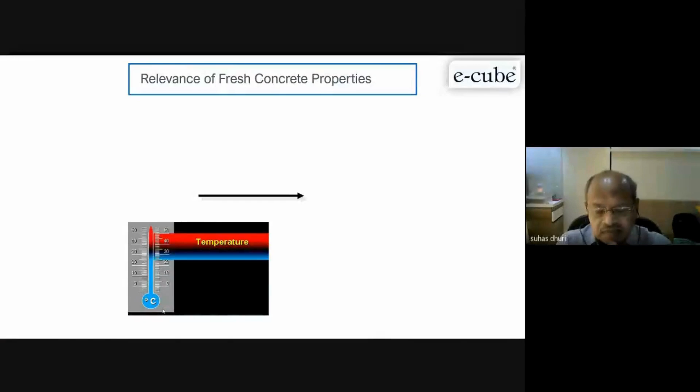Relevance of fresh concrete properties.

Now the properties of concrete, especially what we are interested in, is the flow or workable concrete. Now when you are producing concrete from your transit mixers...

Distance is not much different. Time is more important because sometimes with heavy traffic, even 2-3 kilometers can take half an hour. If you travel by highways, in half an hour you can cover about 20-30 kilometers. That depends upon the traffic. So your workability is basically about time - how much time is required to travel from the batching plant to your site.

From site, it has to be placed by various means. Here we are placing with pump. Pump has got various capacities, and what height it is pumping depends upon your placing capacity. Maybe pumps are designed for 40, 50 or 60 cubic meters per hour - they can place that much concrete. But how much concrete we are actually able to place at site depends on the available equipment and manpower. That one has to understand.

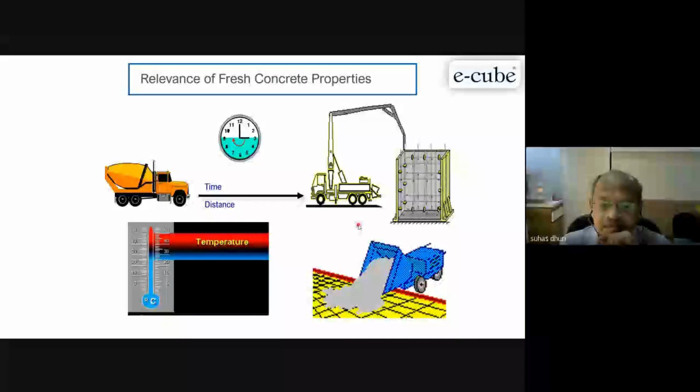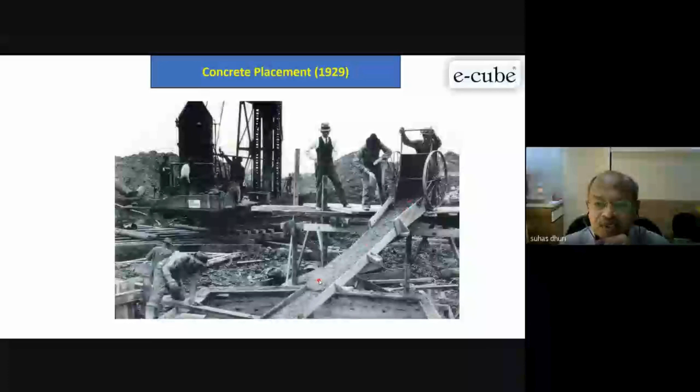Now here's how, earlier - you can see back in 1929 - they were placing concrete directly from the chute, because mechanical means were not there at that time.

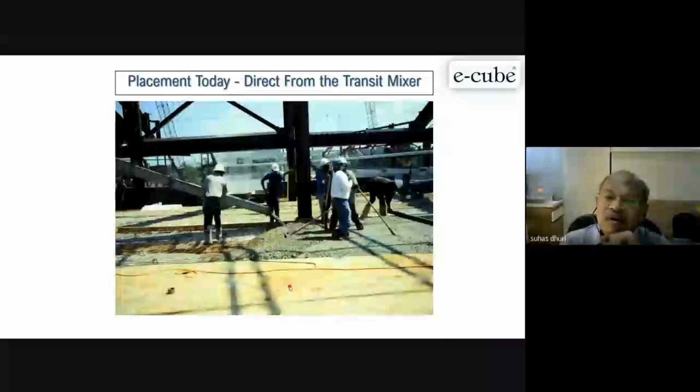This is for roads - directly from the transit mixer we can add, because slump is limited here. But the same concrete is not possible for pavers. When you do the PQC, it's not possible to have such a high flow because the paver is moving continuously with time. So with a fixed form, this is okay - all fixed forms are there. We'll have about 80 to 100 slump, not more than that.

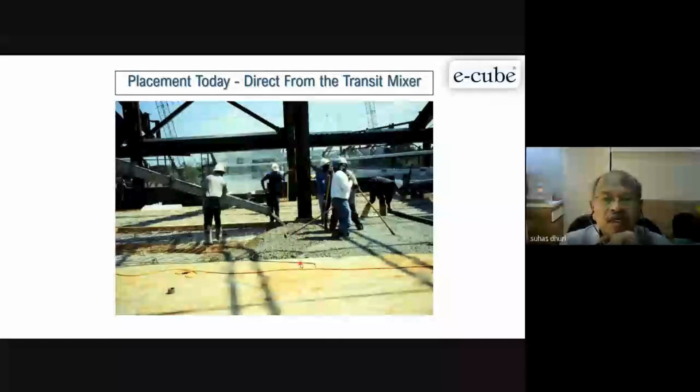So how to handle it, how many people are there, vibrators are there - accordingly you can have a placing time for the concrete.

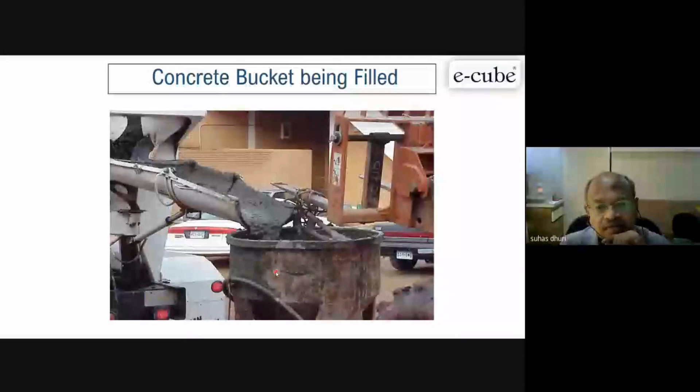Somewhere we can use buckets, because only small columns or capitals of columns are there where it's very difficult to pump, because pump requires a certain minimum quantity. So there we can use buckets. The bucket also requires different workability requirements - without segregation, you can place this concrete.

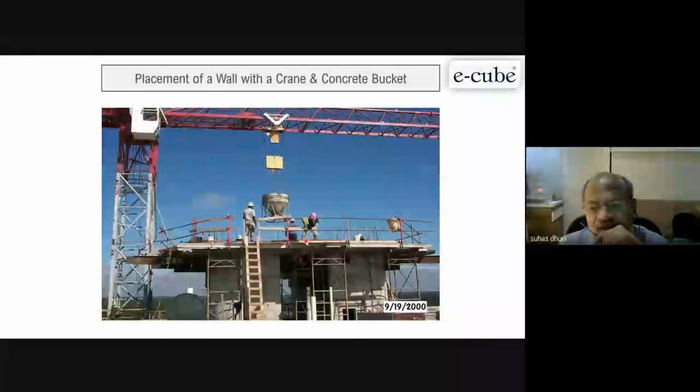See here, crane and bucket are there, and they are placing - because for a small house, instead of pump, they can use only bucket. This is a 1 cubic meter bucket, or 0.75 cubic meter. Today we are getting very big buckets also, 1.5 cubic meter at a time - we can place the concrete, especially for vertical elements.

One has to remember pumping may not require very high flow. Even about 60 to 80 slump also we can pump the concrete if it is designed properly. Pumping also requires designed concrete for pumpable concrete. Normal concrete and pumpable concrete are totally different.

Mix is there we have to design. We cannot normally place concrete which was shown for buckets. We may not be able to pump it, because pumping requires different mix proportioning. Rather the fines content has to be adjusted.

So if you have very high flow, it also sometimes may not pump properly. So pumping concrete is different than normal manual placing of concrete. One has to remember this.

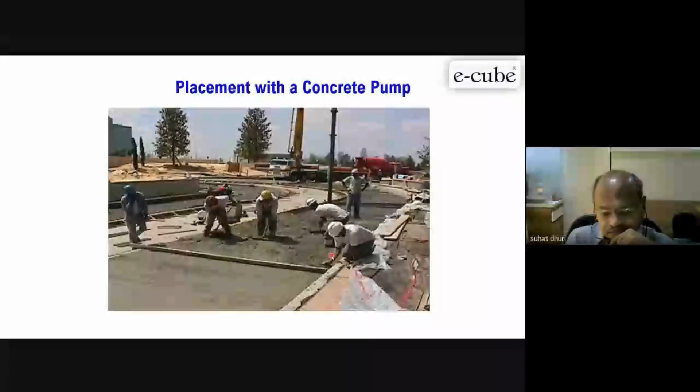This also, see here, they are doing very large industrial flooring using pumps. Here, this is a TM. You can put it into the pump hopper, and with this pipeline it is going to put the concrete here.

One advantage with this is that very minimum manpower is required. You see, this is a vibrator chap. This one is only holding the chute here, pipe, and this is your paver, the leveling equipment.

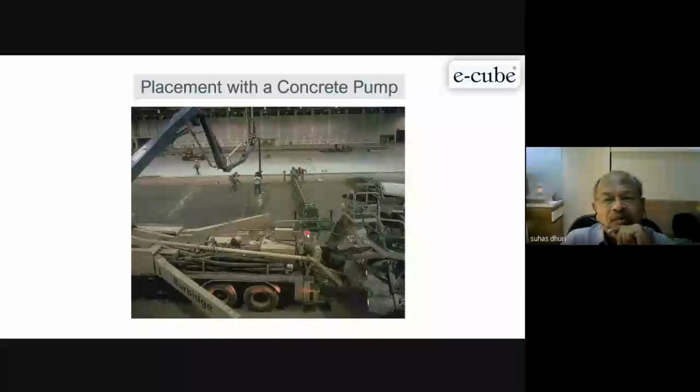This is also laser based leveling equipment where you need very precise leveling of your floors. Generally, wherever you have very big warehouses, their height is more than say 10 meters, 20 meters, there they require a very high level to the floors. So there they use mechanical means, laser based paver or leveling equipment to have a proper precise flooring.

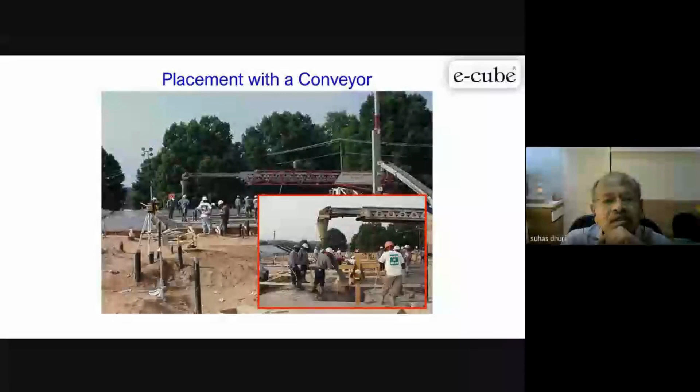Now conveyor belt mix is also totally different than normal pumping, because here pushing is not there, it is conveying the concrete. So you should not have a very high workable mix for this.

So all your workability of your concrete depends upon the paste properties of your binder. That one has to remember.

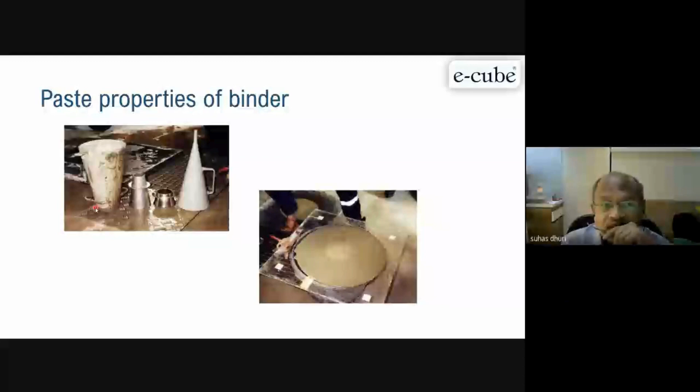This slide I show because we have to understand the paste properties first, and from paste properties itself we can predict what will be the slump of that concrete. So one has to remember this, because everything depends upon the viscosity of your mix.

Now a viscometer is also available, but that is very high cost. But those are also possible to predict the final flow of your mix.

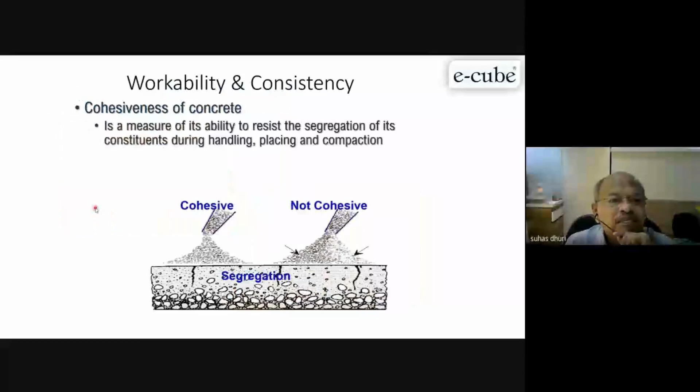So one of the properties what we are looking at in all concrete is cohesiveness. This word one has to remember as a QC engineer or placing engineer. It's the measure of ability to resist segregation of its constituents during handling, placing, and compaction.

So this is the process we are following for any concrete. Any concrete has to be transported, then handled, placed, compacted, and then finished. So this is the process we follow for all concrete.

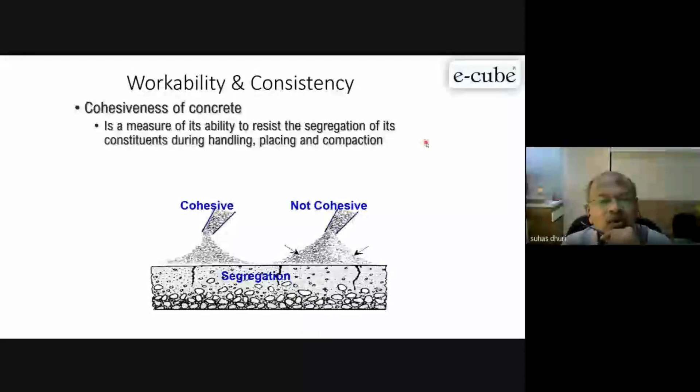So your concrete should be cohesive only, not non-cohesive. You see here, coarse aggregates are here and fine paste is here, which is not acceptable.

Even here also, after compaction, what happens you can see here. It's only paste and coarse aggregate at the bottom. Now this will shrink and then start cracking.

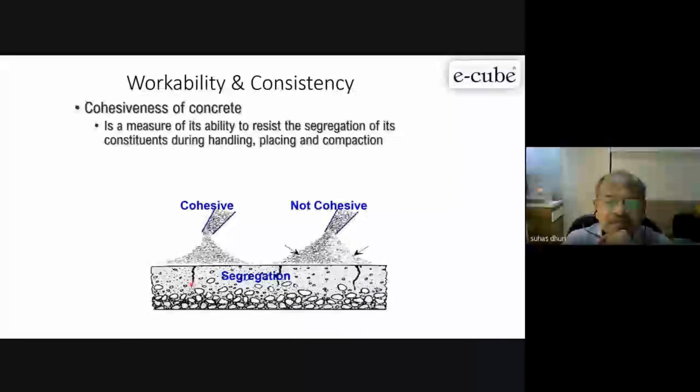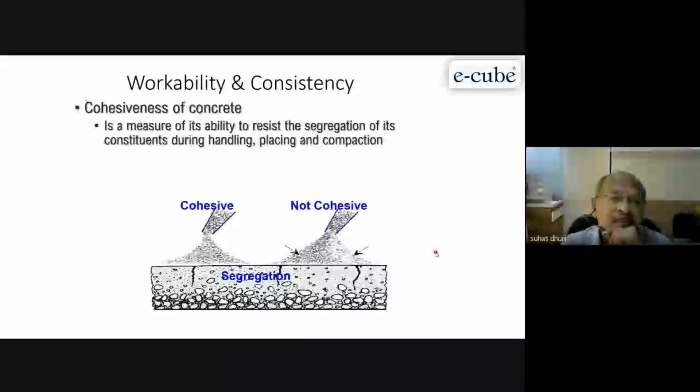Though it is cohesive, once after vibration everything has settled down and segregation has taken place. So one has to design a concrete in such a way that my concrete throughout its placing time should remain in a cohesive state. That is very important.

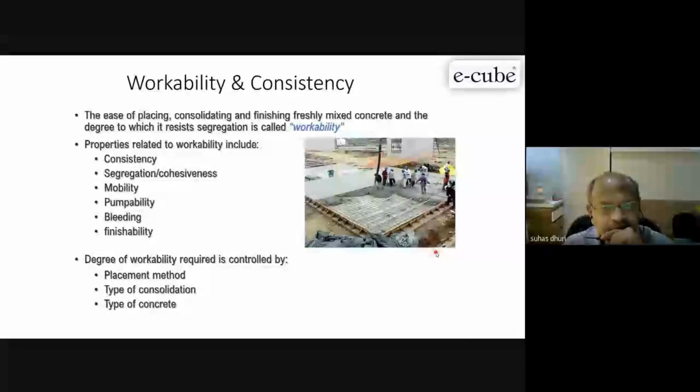Now let's discuss workability. Basically, ease of placing, compaction, finishing of freshly mixed concrete, and the degree to which it resists segregation is called workability.

Workability includes consistency, because it should be a consistent product. Number of transit mixers you are supplying, maybe 100 cubic meters supplied via 15-20 TMs, all that concrete should have consistent workability.

Consistent in the sense of an acceptable range. Suppose the slump is 120 plus or minus 20 mm. It should not be 80, 60 mm, and also should not be 200 mm. That is not acceptable. So one has to remember this accordingly.

Segregation resistance and cohesiveness should be there. Mobility is important too, because some concrete is workable but very difficult to place with vibrators - it doesn't respond, it's a very sticky mix, which is not acceptable. This may be due to various reasons we'll discuss under mix design. So mobility is important because concrete has to move easily with minimum external effort, that is vibration or consolidation.

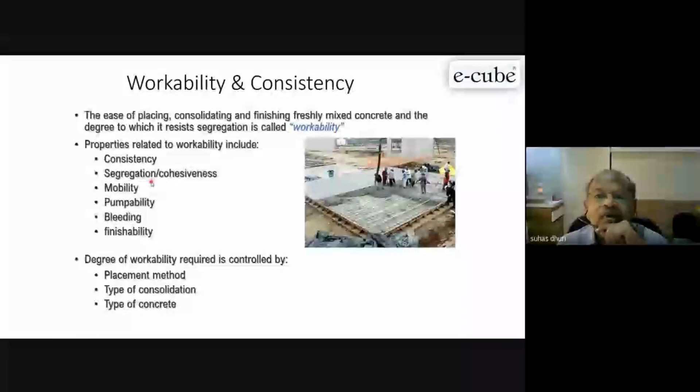Most of the time at site, when stiffness occurs, people go on adding water, which is not advisable. A technical advisor will not allow adding water at site, as it drastically changes the properties of concrete, which is not acceptable for a structural engineer or concrete technologist. So one has to be very careful.

Pumpability - as I said earlier, a pumpable mix has to be designed properly. Pump operators are not exposed to concrete properties, they only know the mechanical part. So whenever there's a flow slowdown, they add water and the pump chokes up more. You should not add water to make concrete workable and then pump. A pumpable mix does not necessarily mean a flowable mix.

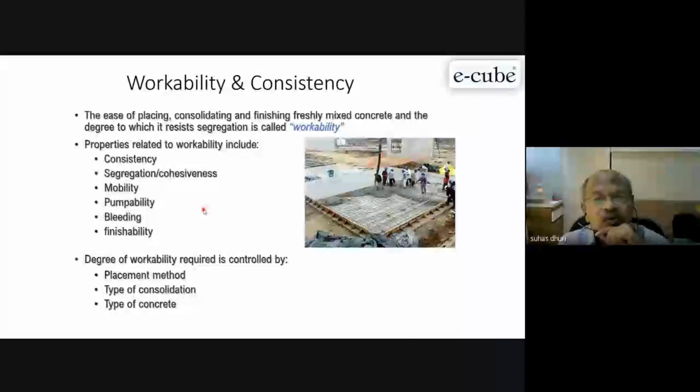A slump mix can also be pumped very effectively if designed properly. You can see here, a very smooth mix moving up. So for pumpability, we have to design the mix properly. When we discuss mix design in that session, we'll cover how to design a pumpable mix, why it is required, and what its real requirement is.

Then bleeding - we've discussed some part already. Bleeding is nothing but when you have finished the concrete, clean water comes to the surface, and that water layer is called bleeding.

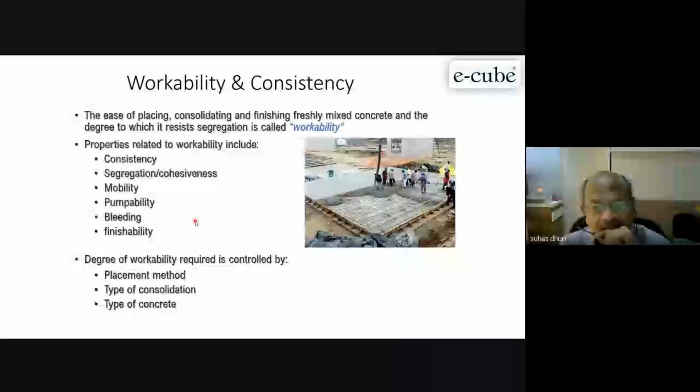This test can also be conducted during mix design in the laboratory. Once you have frozen your mix proportions for particular workability and strength, we can check for bleeding, whether the mix bleeds or not. If bleeding is there, what action to take we'll discuss later. But concrete should be free from bleeding.

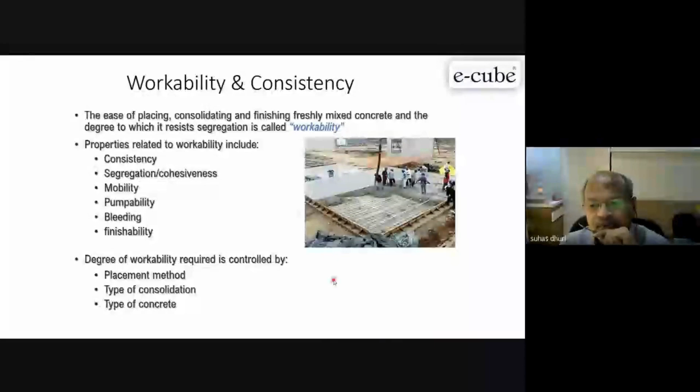It also needs very good finishability - it's very easy to make a finish, as you can see here. So that one has to check in the laboratory itself. When designing in the lab, we'll find whether the concrete is bleeding or not bleeding - those tests are given, and we'll discuss how to test for bleeding.

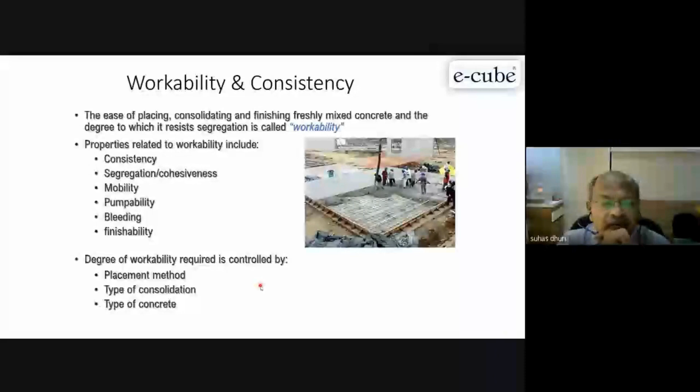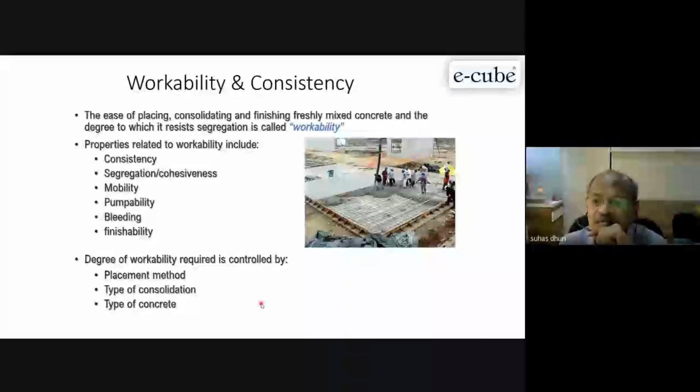The degree of workability required is controlled by the placement method. As said earlier, direct placing requires different flow or workability, pumping needs different workability, and crane placement requires different workability. It also depends on the type of consolidation - mechanical vibrator, internal, external, or only manual modes using rods - and the type of concrete.

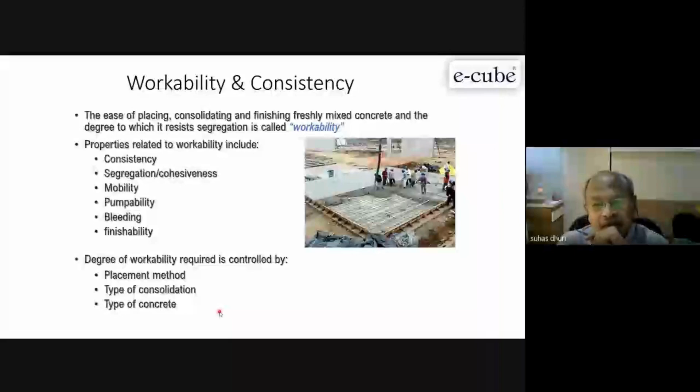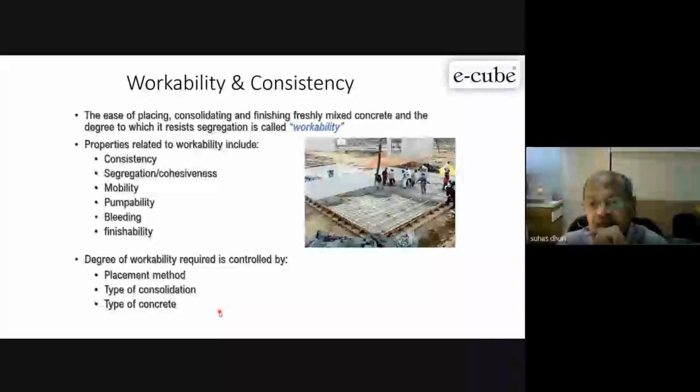Type of concrete - you have precast concrete, in-situ pile concrete, highly flowable concrete, or pavement quality concrete (PQC), where very low slump is required, maybe 25 to 30 mm if using a paver. If not using a paver, using fixed form for roads, you may require about 80 mm slump, which is sufficient.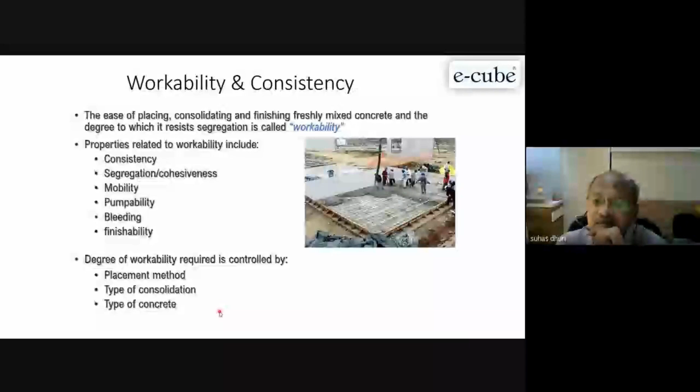But suppose you are doing a column where the depth is more than 4-5 meters, you may need a high workability mix. So depending on the type of concrete, you design the mix accordingly. These points one has to remember when designing concrete in the laboratory.

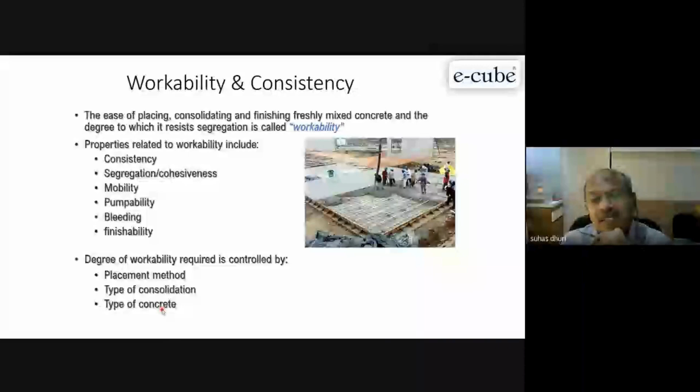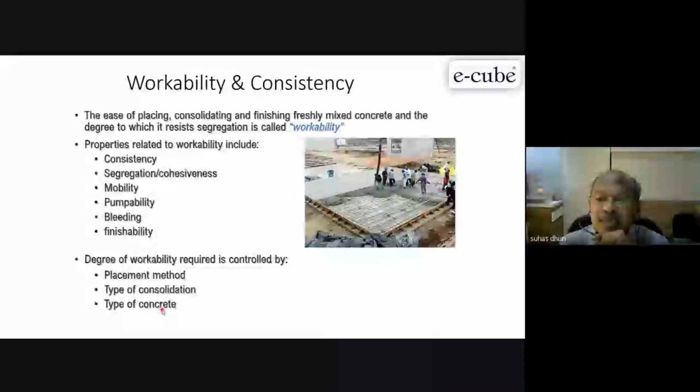There is a request from the project site - I want this concrete of only this grade - but then you have to ask them these questions: How are you going to vibrate this? What is the placing method? What are the ambient conditions? One has to understand this, and design the concrete accordingly. Otherwise, whatever concrete you have designed may not be workable for the site.